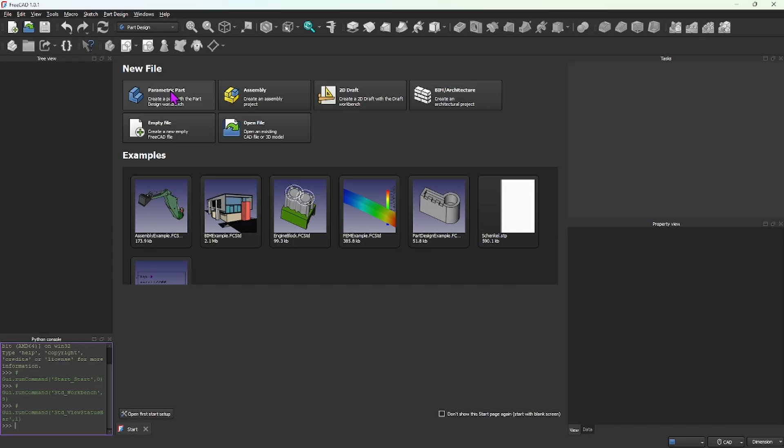So here we go. Let's go ahead and open up FreeCAD. I drew the bracket earlier. While this is open, I'll talk. The approach I used was not all that great, so I'm going to redo it on this go around. So I'll consider that as a practice session. All right, parametric part. Here we go. FreeCAD opens.

I'm going to save as. You can see the shelf bracket up there. I'll go ahead and select that, overwrite it. It's an empty file. All right, the bracket's going to have a couple parts to it, maybe 3. So I'll go ahead and make this, name it, rename. There we go. I'll just call that bracket.

And I know we're going to have one other part, and then I'm going to clone it and mirror it. We'll see how that works. So I'm going to go ahead and add it while I'm here. And rename that. And that's that wire that you saw in the bracket.

All right, go up to bracket, make sure it's an active body. Start a sketch. I think I'm going to use the YZ plane. Double click on that. And double check my grid. I know I checked it earlier. I am in inches. Go down to Sketcher. My grid is set up to 1-inch blocks.

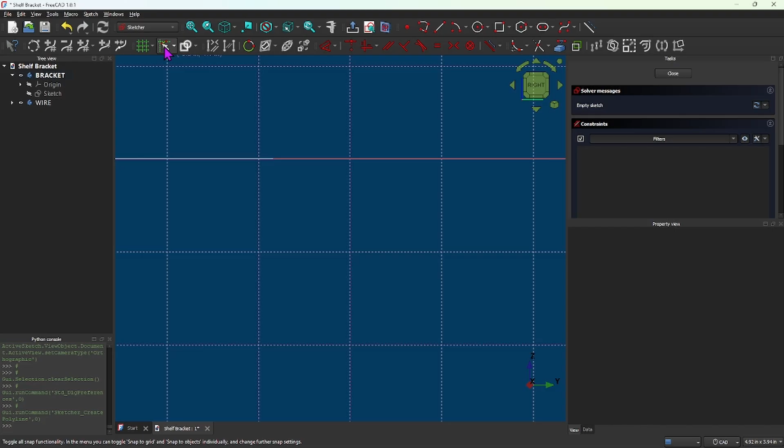I'm going to use this polyline here, and let's see. I got the grid line turned on, but it's not snapping to the line. So I've noticed that sometimes I have to turn it off and then turn it back on for it to work. Yeah, that's exactly what happened. All right, so 6 inches. That's 2, 4, 6. We'll start here. There you go. I'll go up a little there.

I think somewhere around here. Let's make that horizontal. Since we're in polyline mode, I can use the M key on my keyboard to make a selection of what I want to do with the line, and there you go. I want to do that right there. I want 90 degrees, but we'll change it. I'll get it close for now. And then from there we got 2, 4, 6. Is that right? Yeah. 2, 4, and 6.

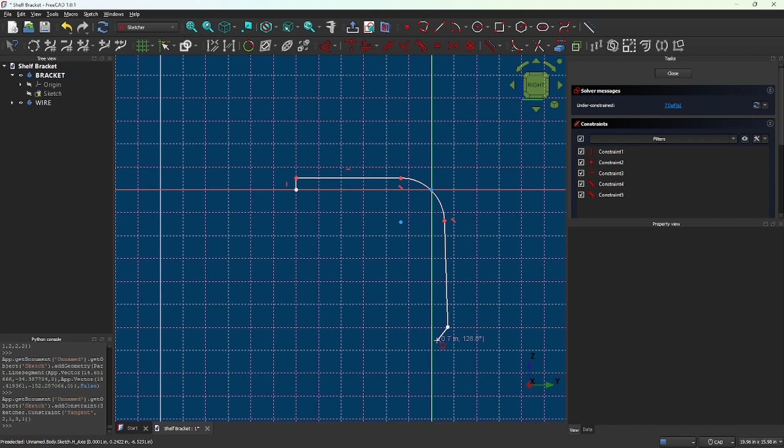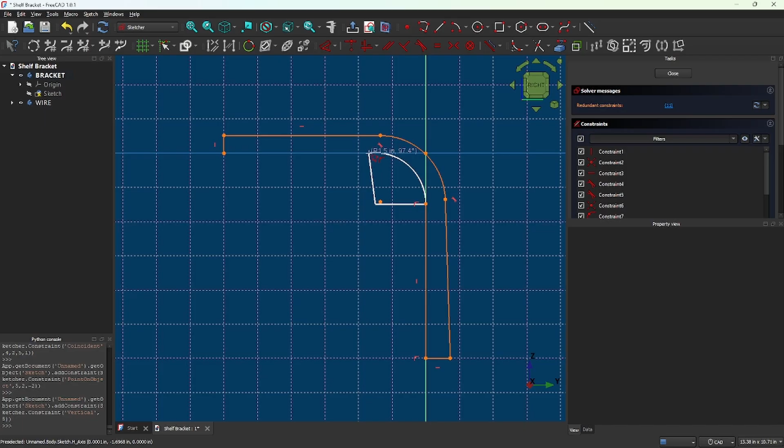So we want to go to this line here. It's snapped. Go to that corner there. Snapped. And we'll come back up to here. We won't go to an intersection, but we'll just select that Z reference line. It doesn't like that. That's okay. We'll fix that. We use the M on the keyboard. There we go. And I do want to snap to that line. And then I'm going to come over here. M to close it there.

All right, I think if I just remove this vertical constraint, it should fix everything. There you go. The reason is the Z axis is already vertical, so I went from this point here to this point along that Z, and it gave it a vertical constraint, which is redundant because you're attaching to the Z axis. Let's just leave it at that. Let's fix this line here. That needs to be vertical. There we go.

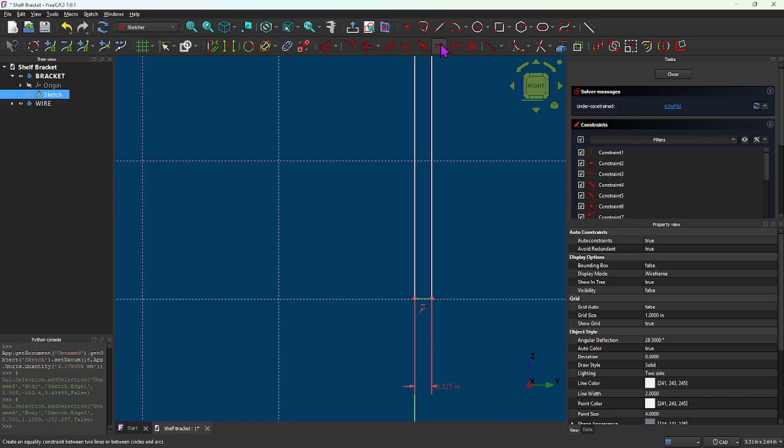It is 1/8 of an inch thick. Make that 0.125 inch. And we'll make that line and this line equal. Equal sign. There we go. All right, that line's right there. Look at that. We didn't quite get to the line there, so I'll have to make this point 6 inches up to the Y axis. 6, enter, there you go. That fixes it.

And what do I want for a radius? Let me measure it real quick.

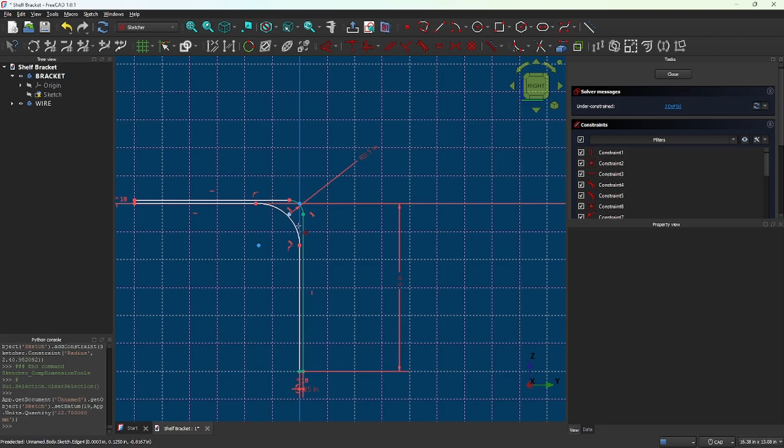I'm showing the outside radius as a 1/2 inch. Put this, and I'll make that 0.5. And then the inside radius is going to be 0.375 or 3/8. There we go.

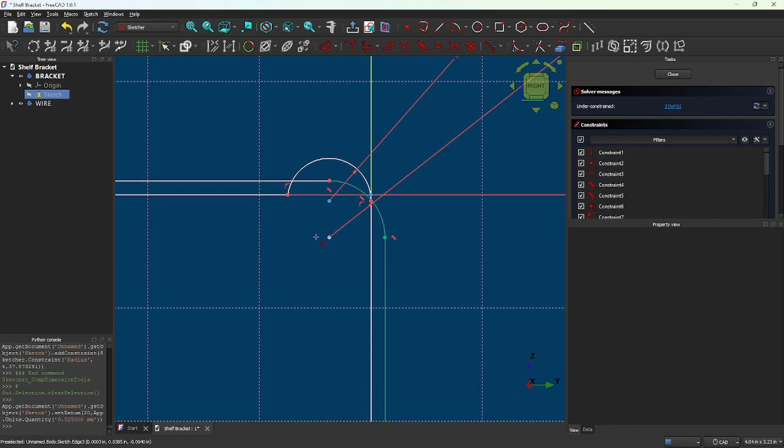All right, so this, I wanted that at 0.375, enter. And what did I do wrong there? 0.375. Okay. Either way, let's go ahead and just make these 2 points on the end of the arc, make those constrained horizontal.

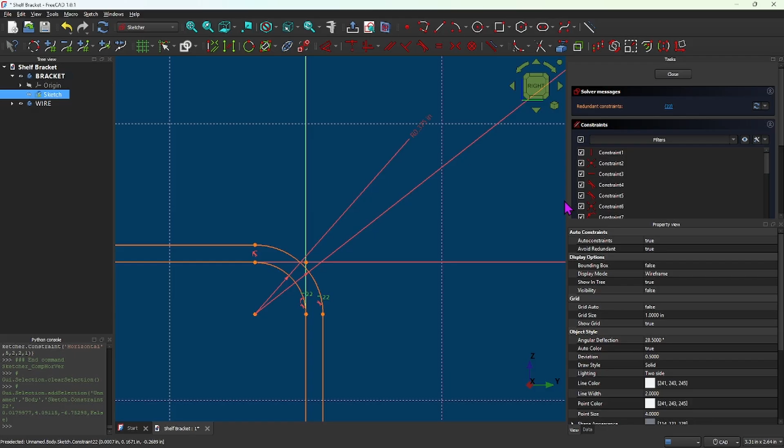All right, now we gotta remove a constraint here somewhere. Okay, it's saying number 22 up here is redundant. So if I delete 22, okay.

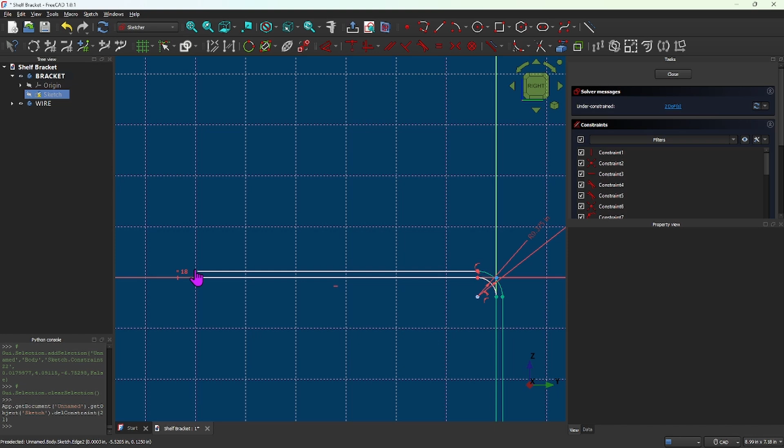All right, let me make this 6 inches from here over to the z-axis. Okay. And then I think what I need to do is just make this line equal to this line here, since that's already fully constrained. And that should take care of it.

Let me give it a try. So select that line, then this line, see if equal works. And it does. Yay. I didn't have to supply a dimension. That's good. All right, we're going to close out of there. And we will pad it. And I know I measured it earlier. It is 3/4 of an inch, so that's 0.75 there.

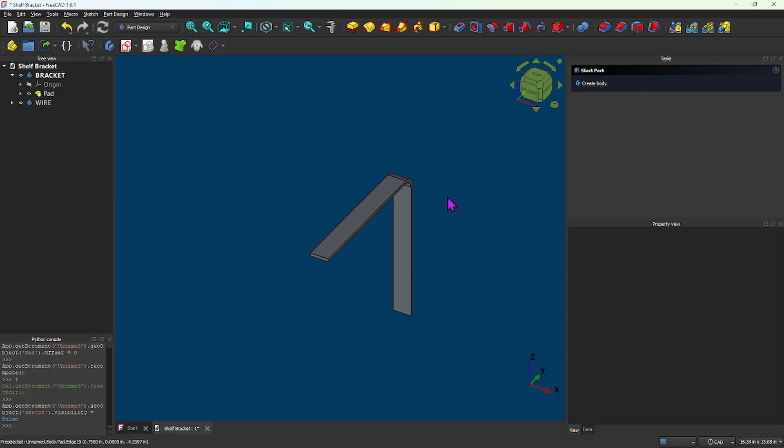All right, let's put some holes in it. I will start with the top by selecting that face and then selecting sketch. It'll use that sketch face as a sketching surface. So there you go. We'll do that.

This bracket has a hole right here and then one that is closer to this bottom edge here than the center. I don't know why they did that, but I think it's because of the way they put the wire braces in the bracket. Maybe they offset the hole because it made it easier for a screwdriver or a drill to utilize that hole. So we'll see. All right, so we'll just go ahead and put the 2 holes there.

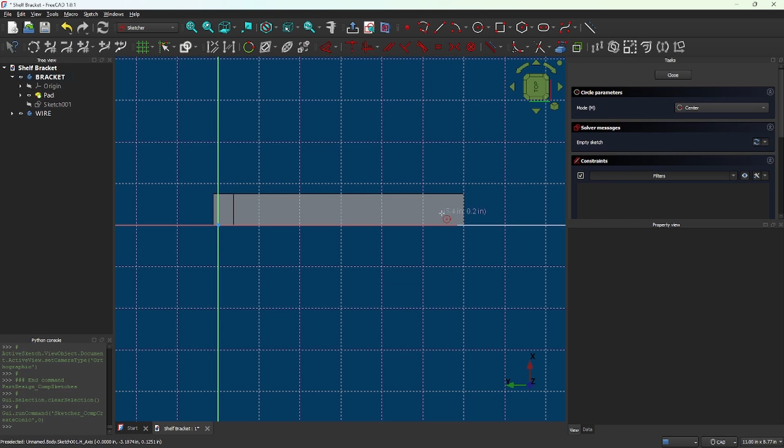Just there. I'm gonna put one over here. Let me hit escape to get out of that. I'm going to turn the snap off because there you go. There you go. All right, and the diameter, I forgot the diameter. I think it's 3/16. Double check it real quick. It's a 1/4 inch hole, 0.25.

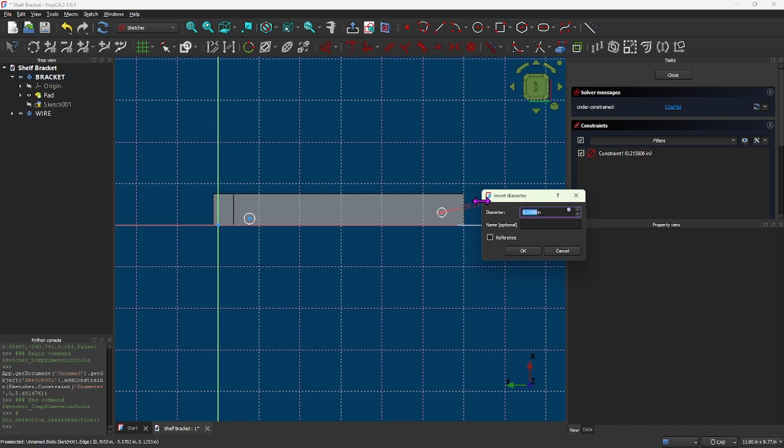All right. And we want this hole to be equal to this hole, which is already dimensioned, and we'll use the equal sign. Okay, the holes are equal. Now we just need to place them. This one is centered, so it should be 3/8 from there to the x-axis. 0.375. And then this one over here, so from the center to the edge is 1/4 of an inch.

So from there to that line, let's go 0.25. All right. Still got 2 degrees of freedom. I want this one from here to this edge is 3/4 of an inch. I measured it earlier. I can go all the way from here over, which would be 5 1/4, or I can use this.

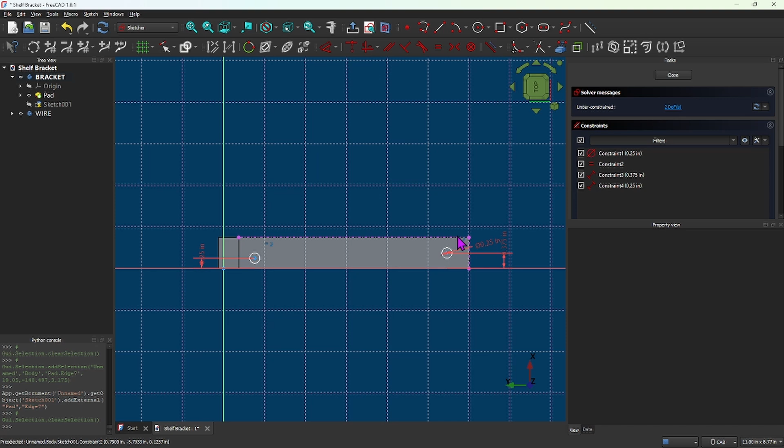Since I used this face as a reference to draw a sketch, I can take advantage of using this icon up here, select it, and use this line as reference on that one. Actually, probably only needed that one there, but that's okay. All right, so from there to there, we'll make that 0.75. That one's constrained, and if I'm not mistaken, it's from the inside of the bracket right here.

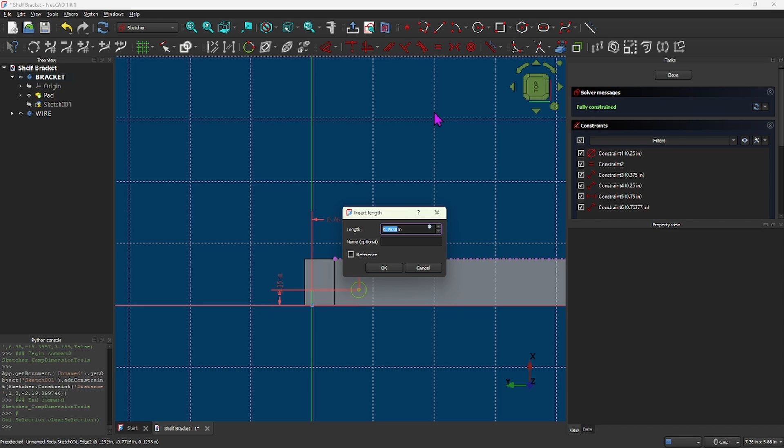That inside leg over is 3/4. So let me double check that. It's actually 7/8, which would have been 1 inch from this outside over, but we'll go here. All right, so from the y-axis over to the center, 7/8. We can use a fraction on this one, or you can go 0.875, either one. But let me use a fraction. 7/8, 0.875. There we go. Okay, it's fully constrained.

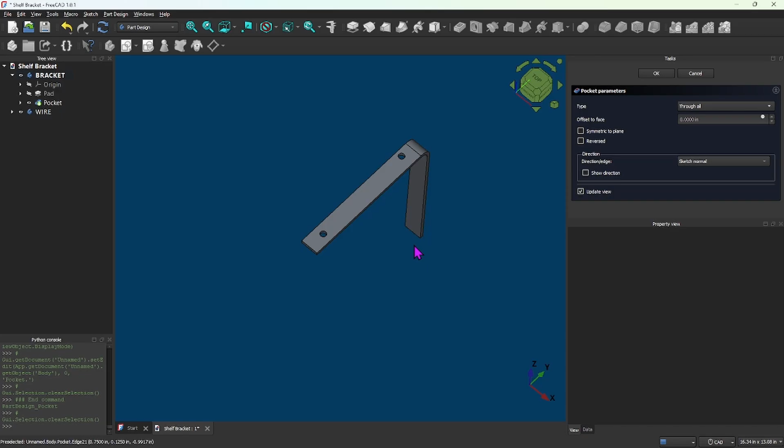Now let's go ahead and close out. And we're going to go up here and use the pocket command and set it for through. You can see the hole already went through, but that's because of this dimension here. I just like to use the through all. You never know when you're going to come back and change the thickness here, and then that 0.19 would not work if you made the thickness more than 0.19.

So I'm just trying to get in a good habit of, I know that hole needs to be drilled through regardless of the thickness of the bracket. So I just went ahead and did that. All right, I'm going to select OK. We're good there. And then we need to repeat that over here.

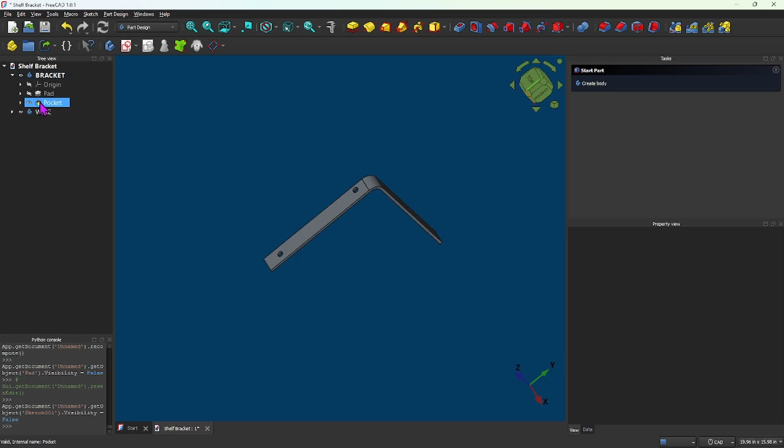Now in the previous bracket, one of the things that I did that did not work too well was I was able to take this pocket over here on the left, the pocket wire, that sketch right there, select it and take those features and move it over to this leg here, copy it over, but the hole remained on that upper side edge and I needed it over here, and I just ended up wasting a lot of time when I should have just gone ahead and selected the face and drawn a new sketch for the hole. So that's for the pockets.

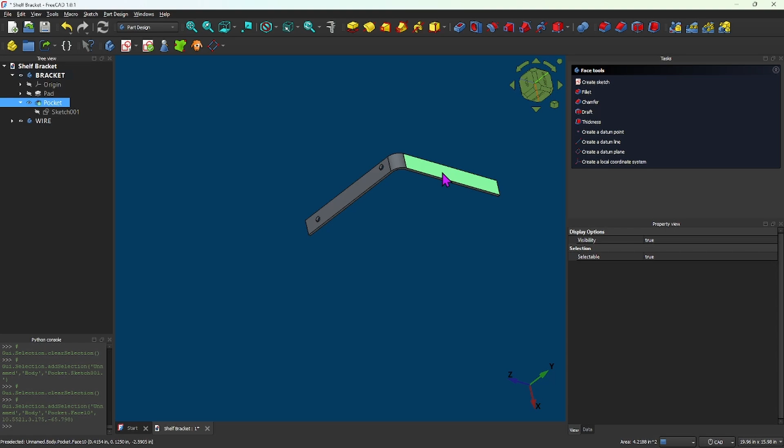So that's what we're going to do this time. Select that face, select sketch, and yep, right there on that face. All right, put 2 holes in here. We knew that one is about right there, and the other one, since that's there, it needed to be here. So somewhere around here. And I'm going to go back to the pocket sketch and just get my dimensions there.

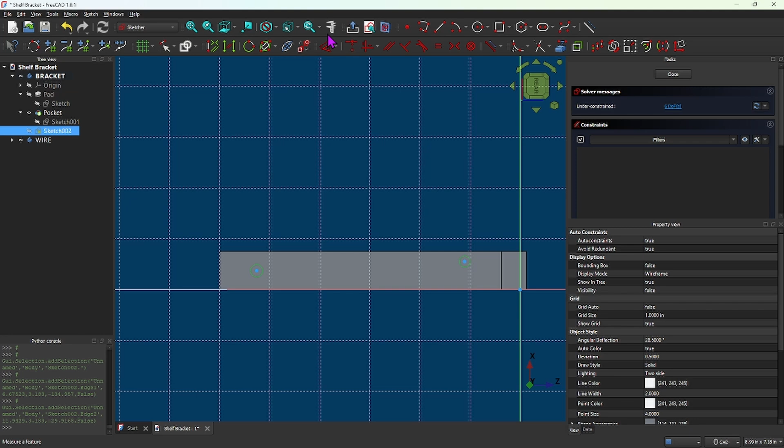The diameter is a 1/4 inch diameter. Close that out, go back to this sketch here. These holes will be, I think I can select both of them. Oh, no. Go up here and hit diameter, 0.25. I was thinking I could do both circles at the same time, but I kind of messed up. If I would have selected them and then did the pull down and went constraint diameter, maybe I could have done both of them. But you notice this time I didn't set one equal to the other.

It's just, sometimes I'm consistent and sometimes I'm not.

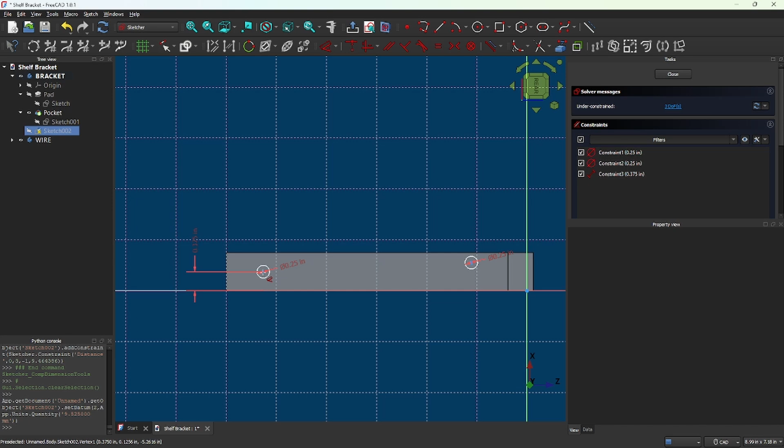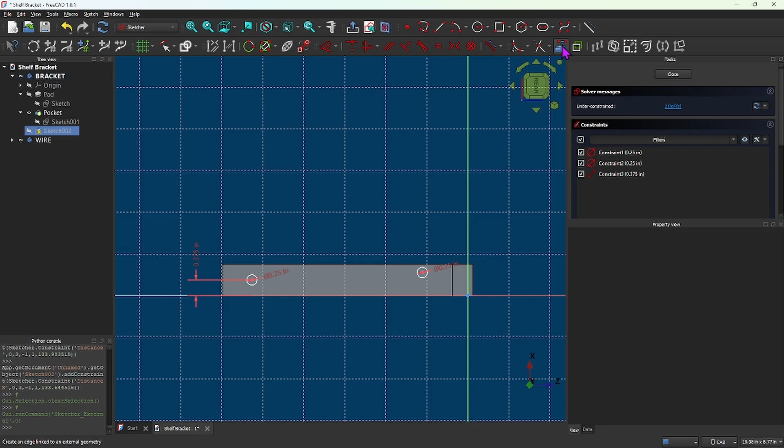All right. So I know from here to this Z axis should be 3/8, 0.375, and then from there to, here we go again. Let me escape. Right click to get out of that dimensioning. And I'm going to come up here and select this reference and use this line. There we go. And we're 3/4 of an inch over from that. So select the center to there and 0.75. We're good there.

And then we said this one was 1/4 of an inch over, if I'm not mistaken. Let me double click on the other sketch to make sure we are, yep, 1/4 of an inch. Let me double click back to sketch 2. And we're going to use that reference line there. Reference command, select the line. There we go. Now I should be able to select the center, the endpoint, or the line, either one. Endpoint. And we'll go with 0.25 and we'll enter that one.

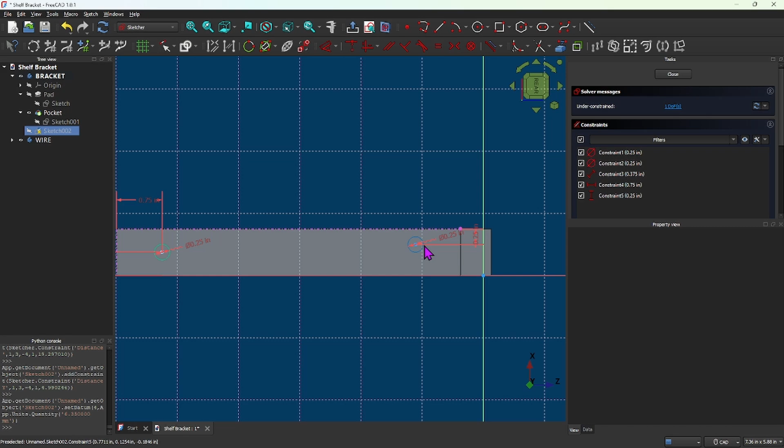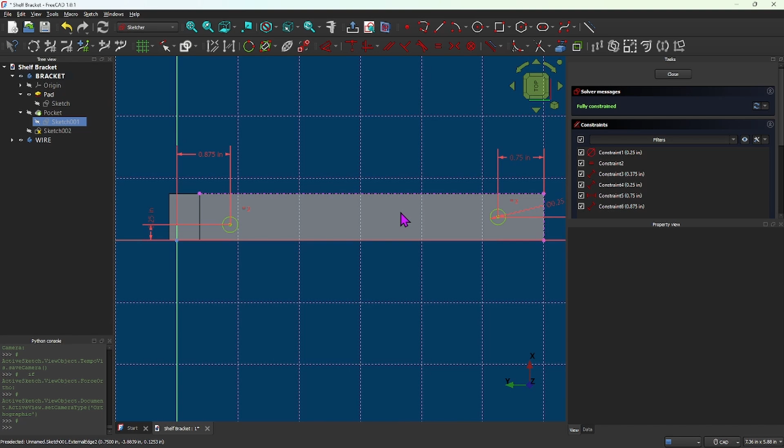Oh, okay, this is now just missing a dimension in that way. We know it's 4.5 inches from center to center. I'm going to double click on the sketch here. .75, 3/4. No, I guess not. That's interesting. I thought it was 4.5 earlier. So from center to center, put a dimension, and it's showing 4.375. Cancel that. Alright, right click. Alright, let me double click on sketch 2.

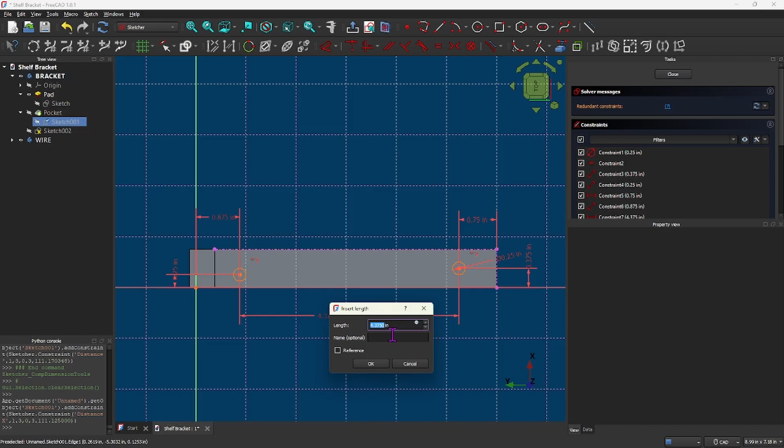And we're going to go with, I forgot it already. Oh boy. What was it? Alright, remember it this time, Billy. Center to center. 4.3, so 4 3/8. Cancel. Right click to get out of that. 4 3/8. Alright, so from that center to that center, 4.375. Okay, there we go. Alright, let's close that. And we got circles.

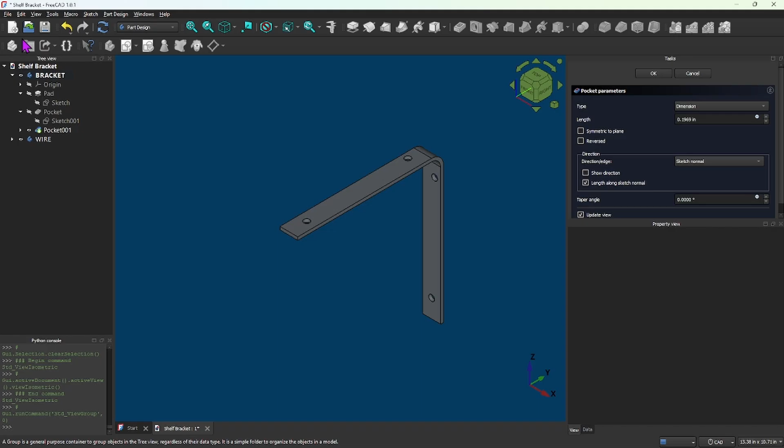We're going to turn them into pockets, and we're going to change it to through all. And there we go. We got the bracket. Come up here and hit ISO. And if you remember, we had some squiggly lines in here. We got to get to work on that. So let me turn these origins on here real quick. What am I going to do? I'm going to draw the squiggly wires here on this YZ plane, and then we'll go from there.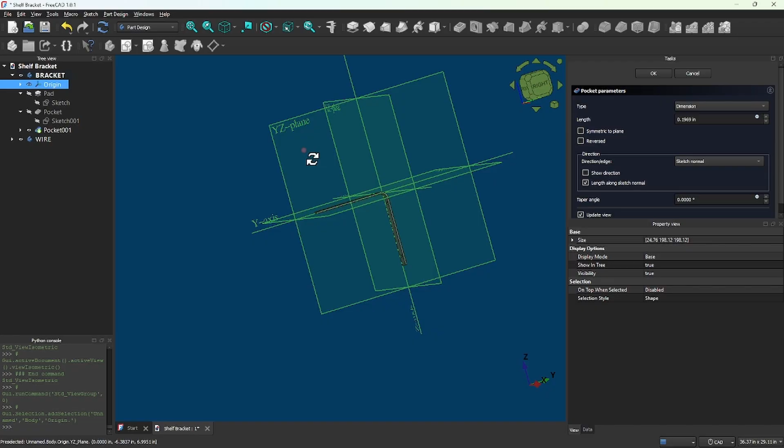Yeah, because then I'm going to have to come back and use this plane here, which is the XY plane. I'll use XY to draw the profile to go along the path of the wire that we draw. So get over here, we're going to use YZ plane. Alright, so turn the origin off. Collapse the bracket. We're done with the bracket. Now we need to do the wire. Got to do a new sketch for the wire, but first I need to right click it and make it an active body.

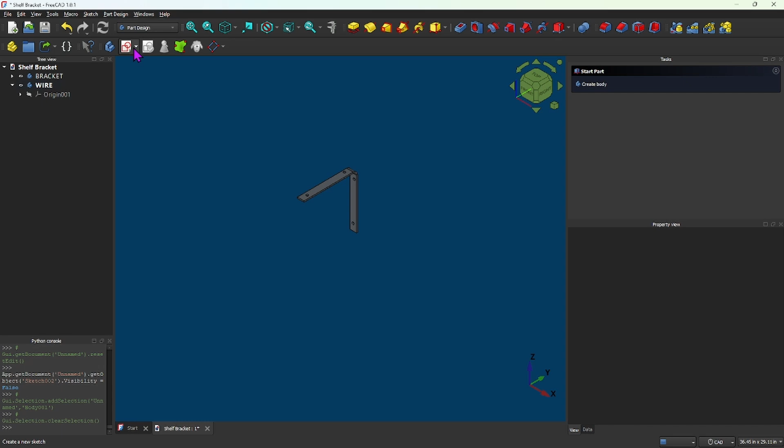Alright, active body. Oh, I was wondering why the sketch up here was shaded, and the reason being I didn't close out my pocket over here, so close that out. Alright, the wire is an active body. Now I can start a sketch. And I want to use this YZ plane right there. Double click. There we go.

Alright, let me show it to you one more time so you'll know what we're working on here. Back. Here we go. Okay. So we're going to do one of these lines here and then make a copy of it, mirror it. So we're going to do the path first, which is the wire. And then we're going to come out here on the end, either here or here, and draw a circle for a profile. And then we're going to make it follow that path right there to do the wire. There you go.

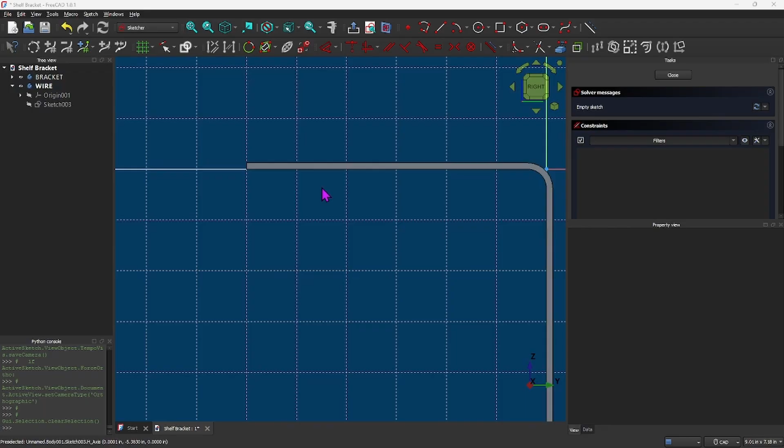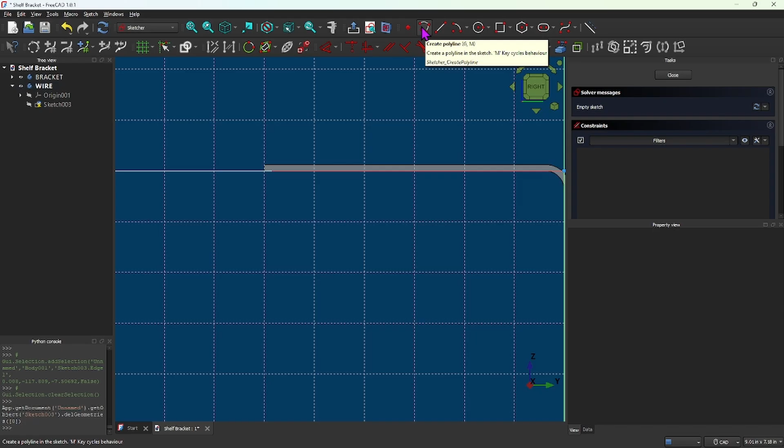Okay. All right, turn this on. I want the end of that line to attach to the grid line. Snap it up there, right about there. Let me use this command here to remove some of the model so you can see it snap to that line. Create a polyline up here, and then we'll snap. The reason why I want to use a polyline is so that I can put radiuses in here. That'll save me a little bit of time where I don't have to put fillets.

So in polyline mode, you can use the M key on your keyboard to just keep selecting M until you get to the radius. One more time. There we go. All right, we're going to swing that around. Then we're going to put a straight line in there. I don't want to snap to any grid lines there. I'm using the M on my keyboard. There we go. Another straight section there.

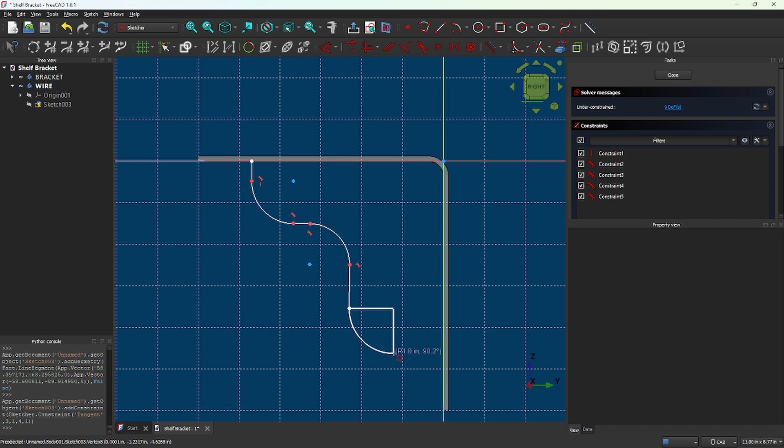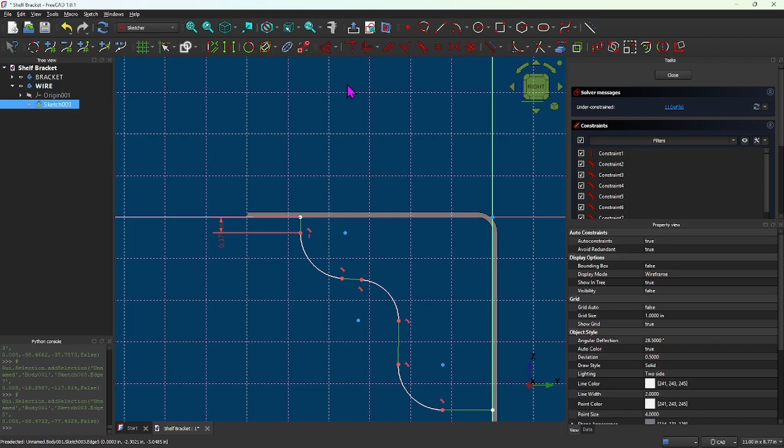And use the M on the keyboard to get a radius. Somewhere in there. And then here, I'll snap to the Z-axis. Then right click to get out of it. Okay. I measured these line segments earlier and they were 3/8, so I'm just going to make all the line segments 3/8 long. 0.375. Click. Now I should be able to select that line segment, and that one, and that one, and then hit equal. There you go.

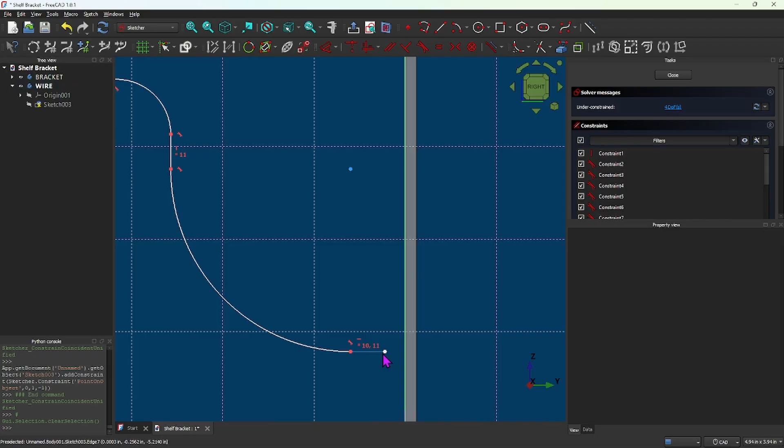Let's now make these lines horizontal and vertical because I don't see that constraint. Yep, look at that, it's jagged. So select the line and come up here and do horizontal constraint. Select this line and it should default to vertical. Select this one and make that horizontal. Now we just gotta play with this right here. I do want this to be coincident to this line here. Select that and use the coincident constraint. Lock that in. And the same here. That point needs to be coincident to that.

Alright, so let's get this line segment from here to there. I'm going to have to measure that one again. I'll let you know what I come up with. Yeah, I'm getting 1 5/8 from the underside of that bracket to here. From there to there, 1 5/8, so it should be 1.625. Therefore, it should be the same here too, from here to the underside of the bracket. I'll make that 1.625.

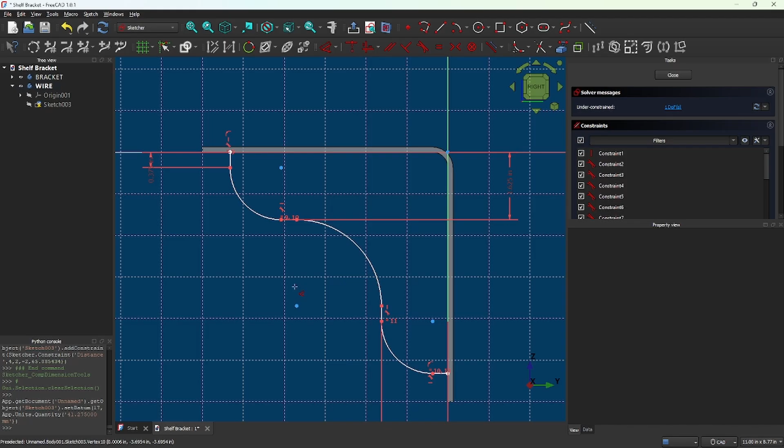We got 1 degree of freedom; let's grab it and move it around, see where the freedom is. I think if we just locate these endpoints of this wire, from here to here, that'll take care of that 1 degree of freedom, and this radius here will adjust itself. And that dimension should be 1.5 from there.

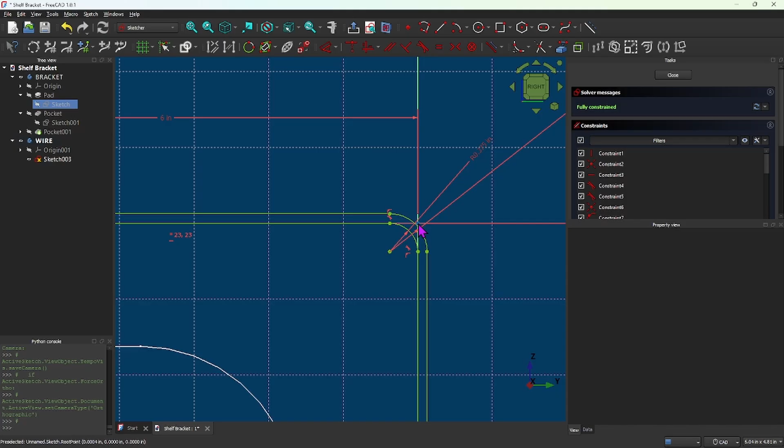And since I did not select the face here as a place to sketch, I cannot use this as a reference, so we're just going to have to do math. I know that from here to the end point is 6. Let me go back and look at the bracket sketch. I just want to make sure I get it right. That was from the center point there, which is inside. Alright, so from there over is 6 inches.

Minus 1.5 inches, so it should be 4.5 inches. Alright, let's go back to sketch 3 and see if that works. So from this point over to that point, it should be 4.5. There we go, fully constrained.

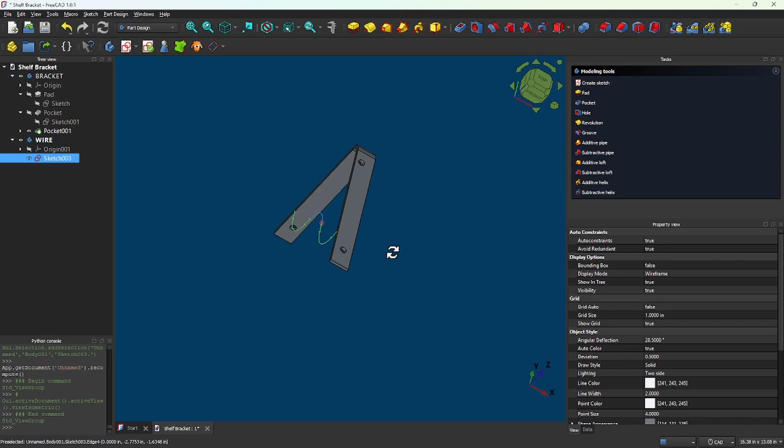We can close it now. Is this up here? We have a wire. And now this wire is going to be the path where we run a circle, and we're going to use this loft command, pipe lofting I think, or additive pipe. That's a loft.

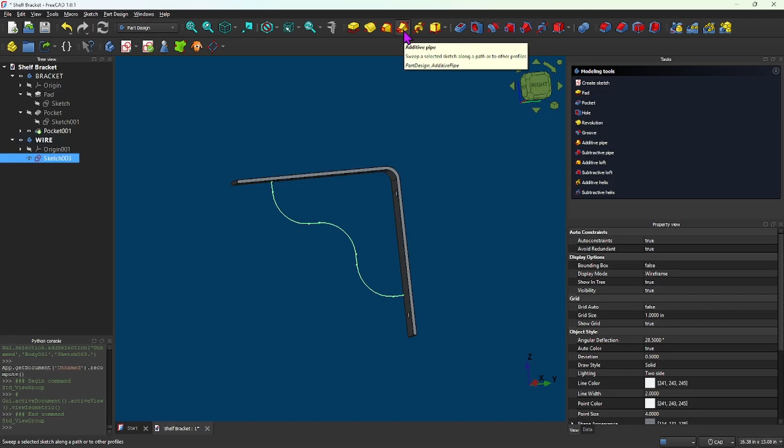Sweep a selected, let's read it. Come on. Sweep a selected sketch along a path or to other profiles. So we're going to go along a path. Now we have to get the diameter of that wire drawn on this endpoint,

and that is why I chose to put, oh hold on, let me make sure that's right. Yeah, that's why I put the end of this wire to the underside of the bracket, because that underside, oh, I put the underside of the bracket on the origin. Let me show you that up here.

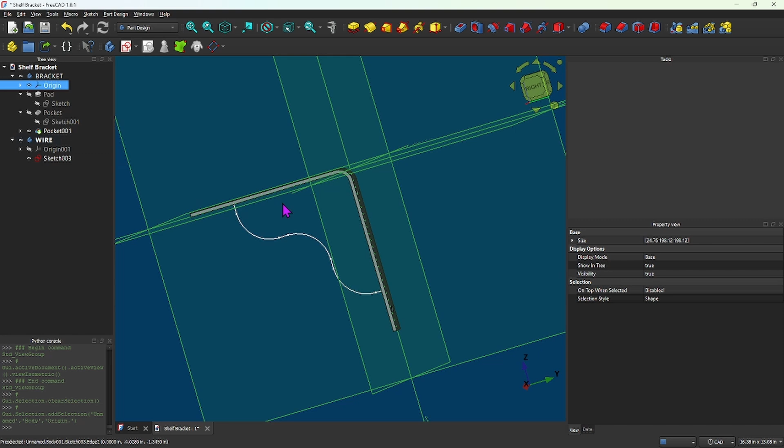Turn the origin on. There you go. There you go, you can see the bracket laying on the plane there, the XY plane to be exact.

And it's going to make it easier to draw a sketch on the XY plane and put the circle right over the end of that wire. In a previous bracket that I drew, I made the mistake. I didn't realize it was a mistake at the time, but it just made sense to me that this outside edge of the bracket was flush to the plane, but then it created

issues for me when I started to put the profile, that circle, on the end of that wire. So I'm glad I'm remaking it because I can make the video shorter. So let's go ahead and do that.

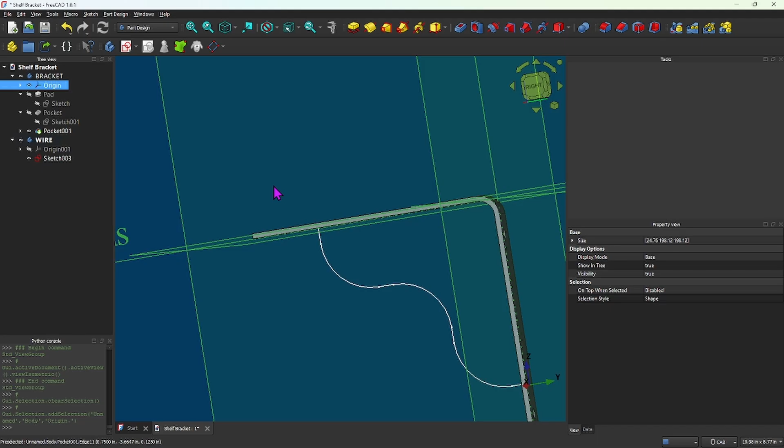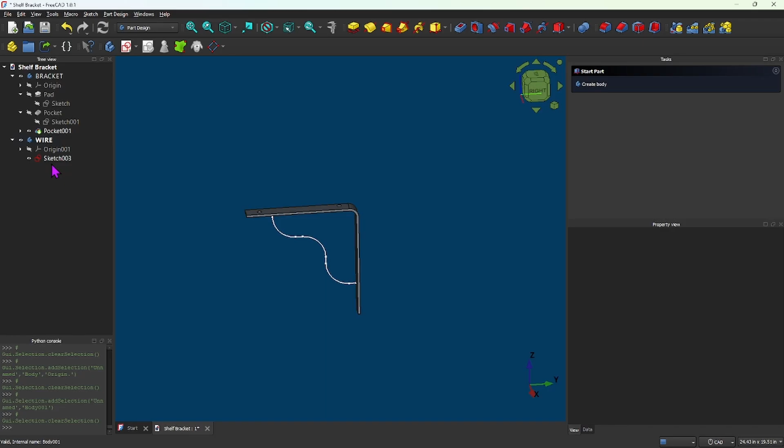Alright, and we may have to do a little bit of math here to get that wire there. Alright, turn the origin off. We already know it's going to be on the XY plane, so turn that off. And we're going to do a new sketch, but we want the wire to be an active body, and we're going to start a new sketch in that active body.

And it's going to be on that plane right there, so double click that plane. I want to skew it over. You can see the end points right there. That's where I want to get to.

So what I'm going to do now is take this bracket right here, and I'm going to go up here and select the eye to make it disappear so I can focus on getting here. Alright, this reference is not going to work on that line. I'm wrong, I stand corrected. It did work.

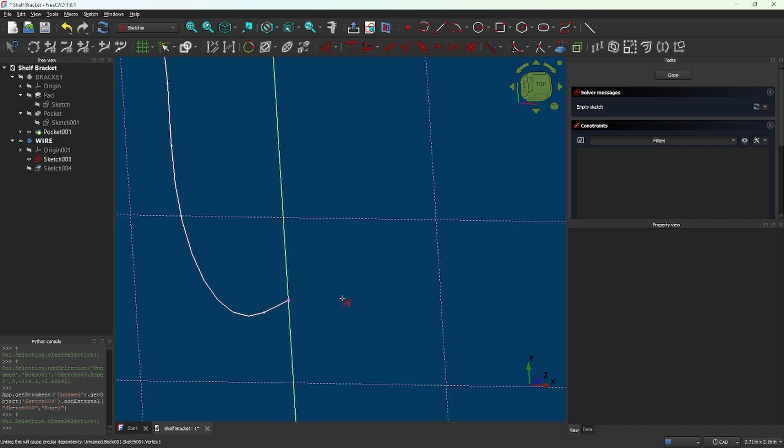I think it's because it's inside of that wire body, it allowed me to use it, so that's great. That means I don't have to do any math to figure out where to put the circle or the profile. So there we go, that's going to be the center of our circle. Yay, hey, something worked for me.

Hard to believe. Alright, there. I know that circle I want it to be. I thought I knew what I wanted it to be. Let me select it. That. And I think it was 1/4 inch. Let me double check that. Double checking, and yeah, yep. I'm going 1/4 inch, 0.25, and there we go.

Alrighty, look at that, it's right on the end of that wire, so now we can close this. While it's selected, we should be able to come up here and do the yellow, the additive pipe.

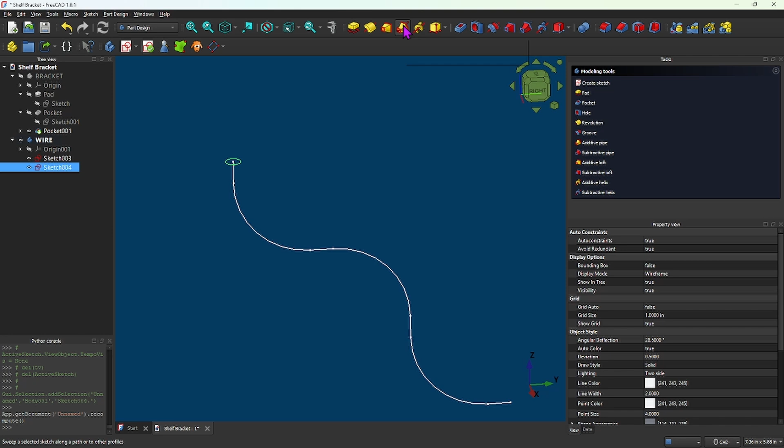Select that. I'm getting invalid subnames right here. I think we're going to be okay. No spline. I probably could have or should have selected the spline before I selected that, but that's okay.

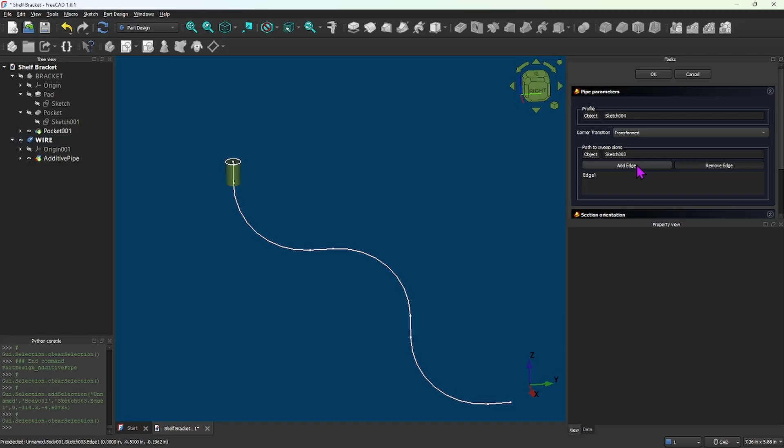We can add edges right here. Sketch 4 is the object. Here's the path. So select an edge. There you go. And you have to select this edge each time, which is why if I would have selected that wire before, then it would have gone ahead and made the sweep for me instead of doing what I'm doing now.

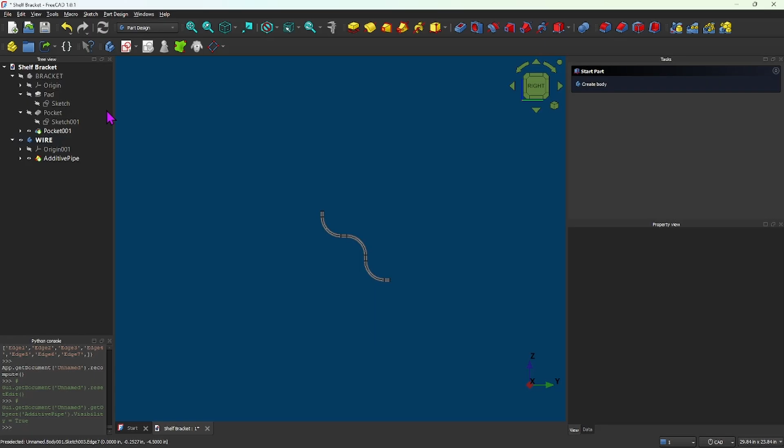Add the edge, and you'll notice that as you select the add edge, there's like a magenta border around it, and you see the path that's already been selected is magenta. So whenever you see that magenta, that's a good thing. All right, add this last one here, right side. Okay, select OK, and now I'm going to bring the bracket back.

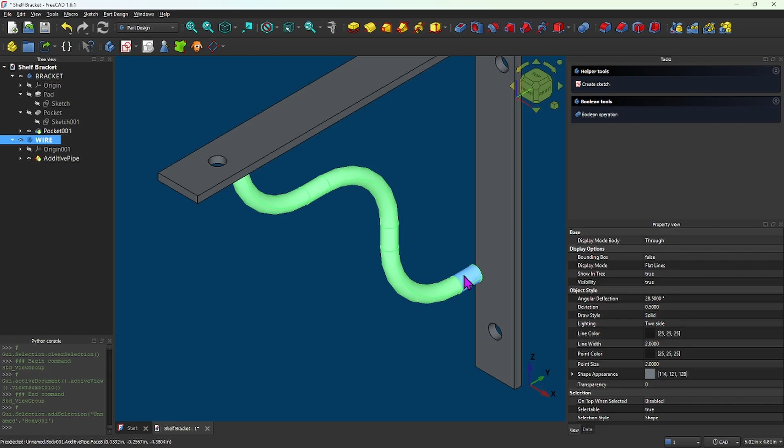All right, now all we got to do is move that wire body over. Just to explain to you earlier, I tried to draw this wire and tried to make a copy of it, but ended up referencing it somehow to this bracket. So I couldn't move the wire. When I moved it, it created another bracket, and I had two brackets and two wires, and couldn't do anything with it. That's why I had to start over, which is a good thing - I learned from the first one I created.

We will now need to make a copy, a clone of this wire, mirror it, and then after we mirror it, we can center it on the bracket where it belongs. All right, I might go ahead and try to center that now.

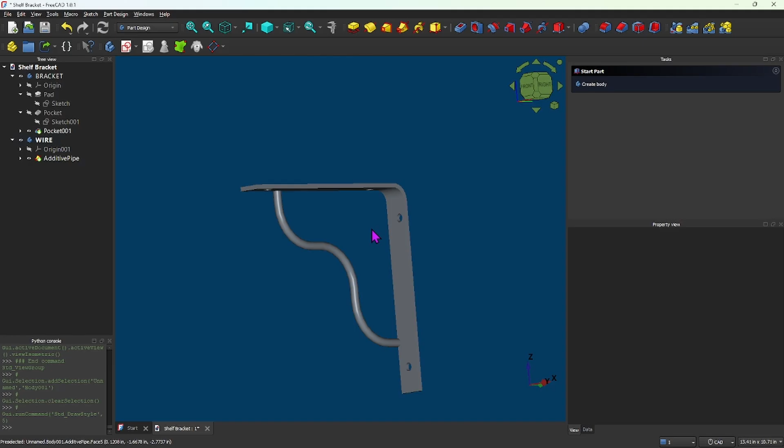Some people kind of don't like seeing all these lines here. You can right click and go into your drawing style, set that to shaded, and you get that shaded look. But that's when you're developing, if you're going to render your model. If you want kind of a rendered look, you can do that.

I find it easier for me when I'm constructing to use the wires. So I'm going to right click the screen, put the drawing style back - that's no shading, I don't want that. I want drawing style, flat lines. There you go. It still gives you kind of a rendering with light reflecting off of it and the lines at the same time. That's fine with me. That works. All right, so what's the next step?

I want to copy this wire, but first let's get it into position. We want to move this over along the x-axis. I would say 3/8 of an inch, but then that would put that right dead center. And we got to make a copy of that wire, mirror it, and put it beside it. So we don't want to quite go there.

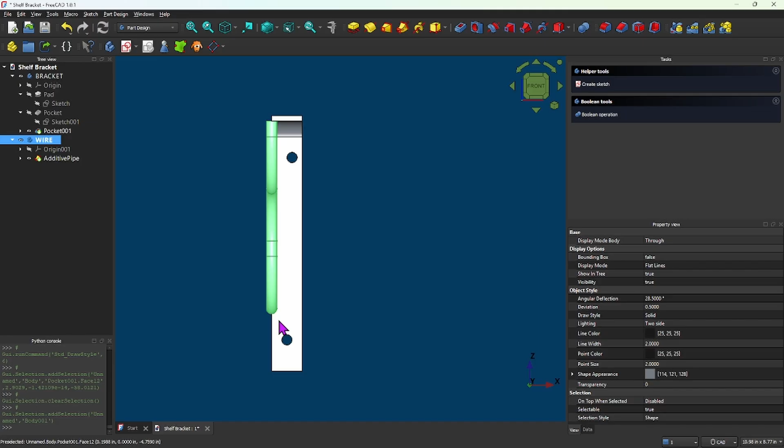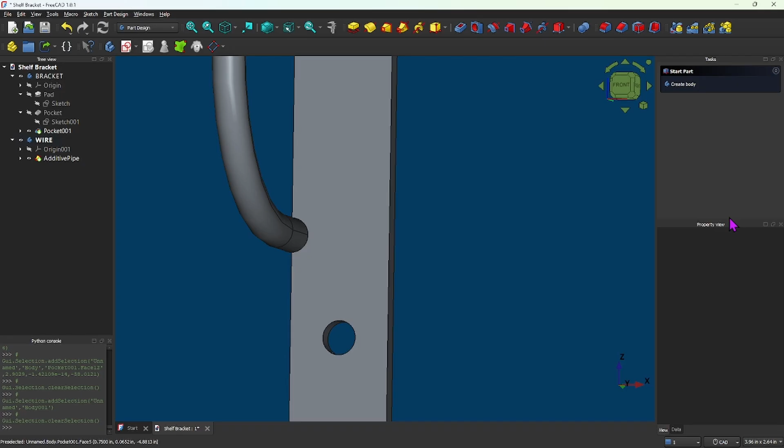What we want to do is put the edge of that on the center of this bracket here. So let me show you a trick for doing that. First I want to slide this over. I had to mess with these earlier too because I was reading information. All right, so we're going to go in here and grab this.

I'll grab that line right there, and I'm going to hold down the control key and grab this circle. With those two selected, I should be able to use the caliper icon, which is to measure, and it'll give me some X, Y's, and Z's. See that red X? You can't read it because it's hidden behind the Y. But that line right there, that's how far we want to move it over. So what do we do - rotate the view, or maybe we can zoom in.

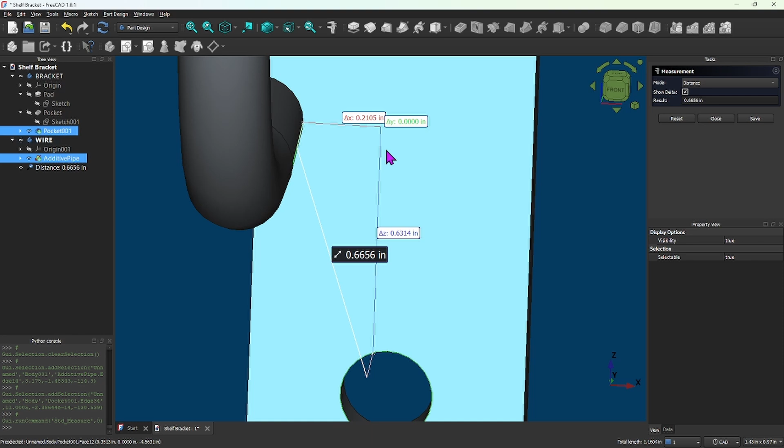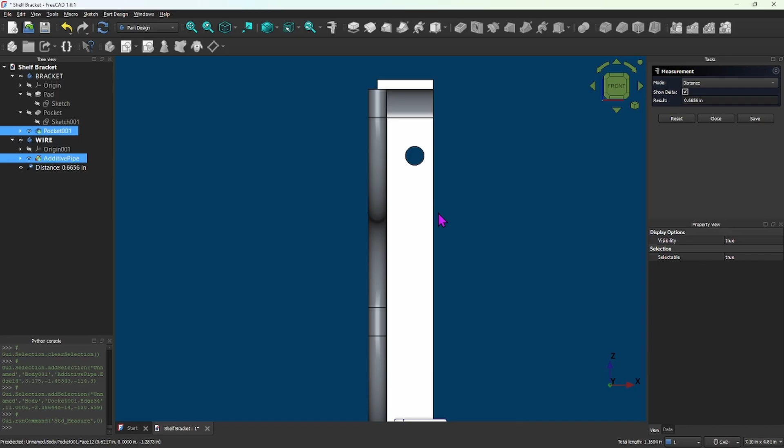There you go, zooming in helps. We want to come over from that edge. Oh, you know what? It's not to the center. So let me try a different way, because that should have been a better number than 0.2105. Let me try a different way on that one. Front, come on, Billy. That's strange, it should have gone to the center of the hole. Guess not.

Alright, I'm going to try something different. Let me close that, and I might be able to grab - there you go, I want that edge right there, that circle. That one, hold down control key, select this one, and now do the calipers, and this time it went center to center.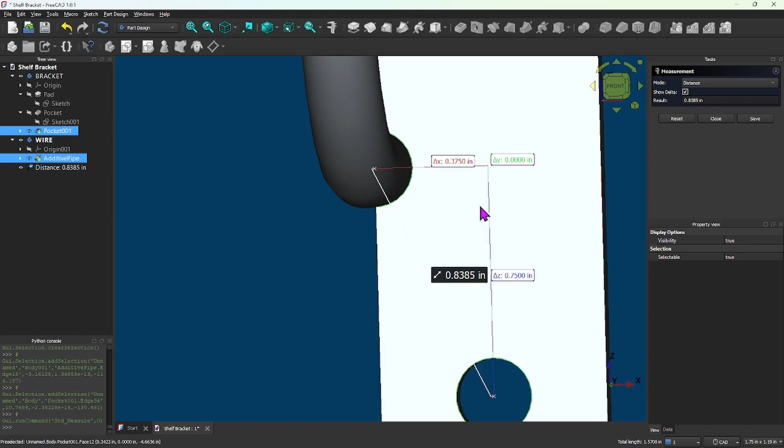We need to go over 3/8 to align it, but we didn't want to do that. We want to go 3/8 to that edge right there. So maybe I'm going to have to do math. Since this is a 1/4 inch diameter wire, it's going to be 3/8 minus 1/8, so that puts us at 1/4. So I should be able to just move it over 1/4 and we'll be fine.

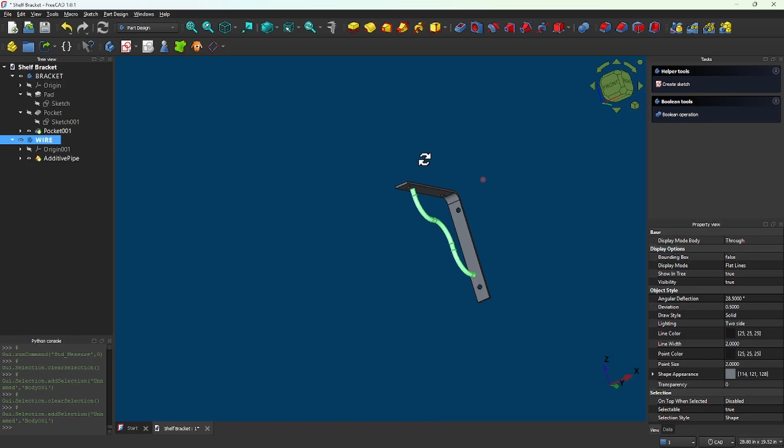Alright, close the calipers, and we're just going to move this wire to the right along the X just 0.25, and that should center the edge right on the center of the bracket or the hole. Alright, select the wire, right click and go to transform, and the increment up here we want to set to 0.25.

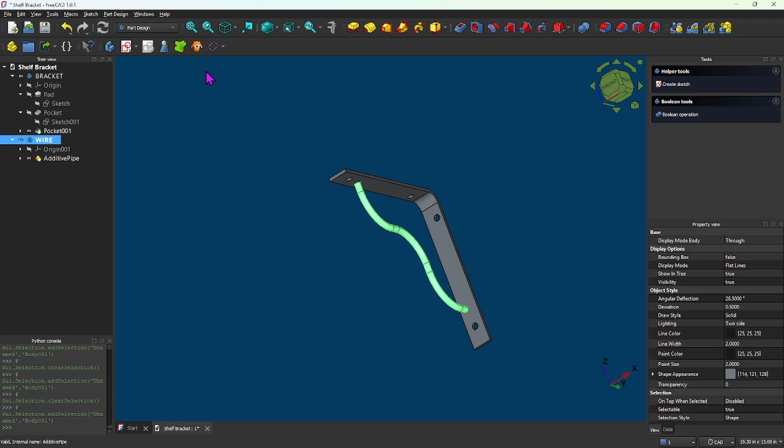You don't need to select OK, just grab this, pull it over, and it went over 0.25. Hit OK. Alright, now let's copy that wire. This is going to be the tricky part. What I'm going to do is clone it with this command here, that wire, and now we have a clone. And that clone, with it selected, coming up here, right click it, transform it - it's already set to 0.25. Pull it over. There we go.

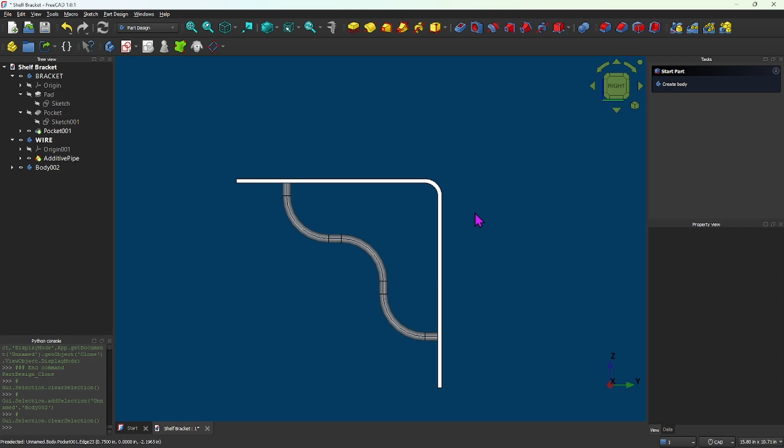Okay, but now we need to mirror that along a line, and that could be problematic. Let's see.

Mirror it or rotate - I think I can rotate it, is what I want to do. Alright, I'm going to have to play with this. Maybe I can rotate it 180, select it, transform it. My brain is kind of smoking right now. I can rotate it in 90-degree increments. Let's see what happens here, but then it's going to end up over here. That might still work.

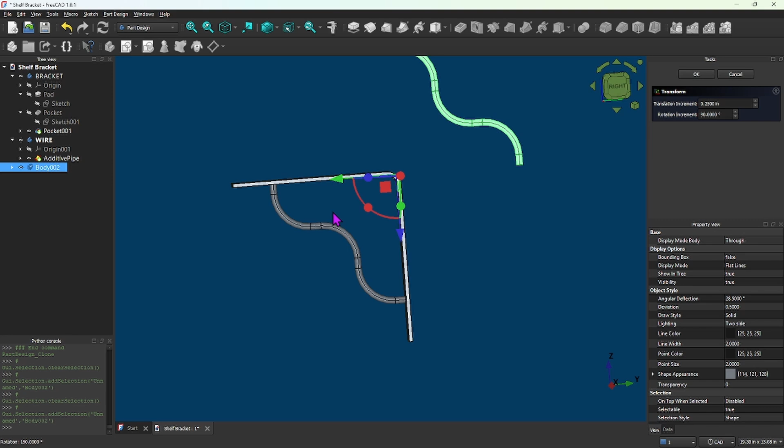Pull around 90, 90. Okay. Now if I can move that down to here and over to there, then I think we got something going on here.

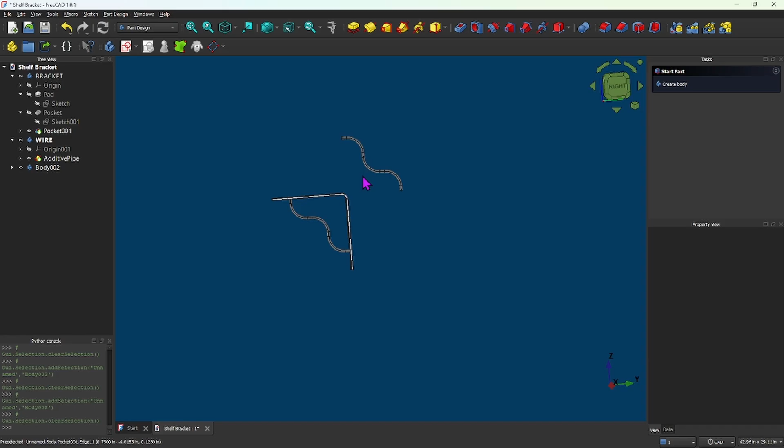Let me see if that's possible. First of all, let me hit the wire, hit this guy here, right click and transform. Like I said, my brain is smoking. Alright, we want to go down from here to here - was 4 and something. I forgot, but that's okay. That's perfectly okay, because I can cancel that.

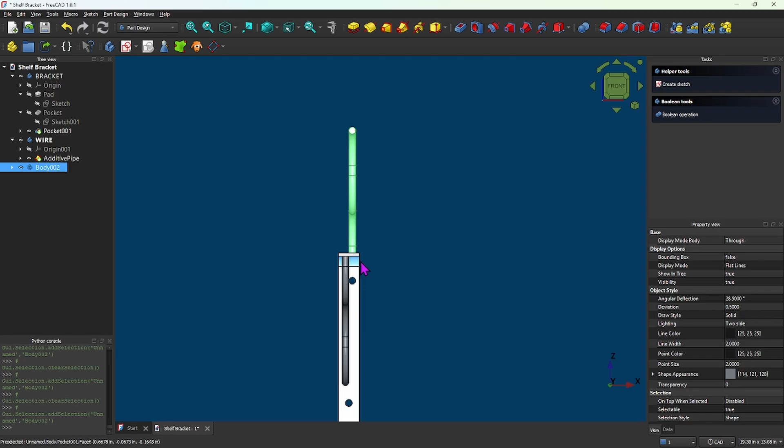And get a dimension. Let's get a dimension from select front, and we want to get this down to - I want that top edge to be there. Alright, my brain is smoking again there. And then I want to select there. Oh, I gotta hold down the control key. So to the bottom there, to there. Hit the calipers, see what we got.

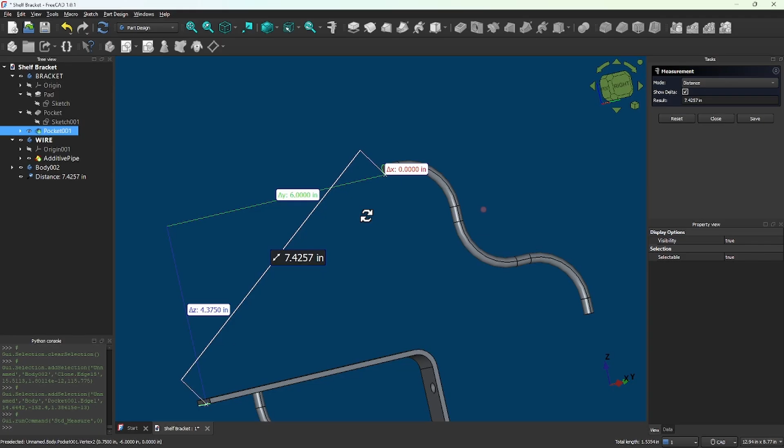Alright, we're gonna bring that down 4.375, plus we need to add another 1/4 inch to get the top of that down flush here. Let me hit the right side. Yep, so that's 3/8. If you add 1/4 inch, that's 2 more eighths. That's 5/8. So we should set the transform to 4 5/8, and let's see what happens there.

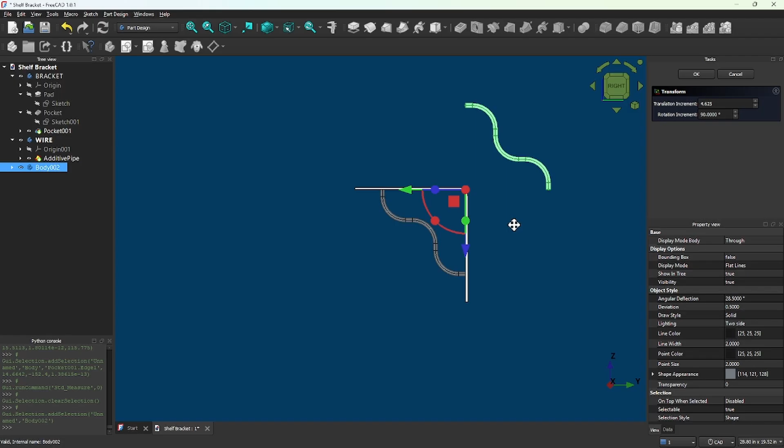Close this, and we'll transform this body. Right click it, transform it, and over here on the right we want to set it for 4.625, and grab this arrow and pull it down, and there we go.

Alright, now I could probably do this a lot easier with the assembly workbench right here. I'm still learning it - I'm getting pretty good with it right now, but for this hardware bracket series, with these static pieces, I'll move them around like this, but I promise you I will get more into the assembly workbench. I'm going to save it for like when we do a hinge where we have a rotating part. We can set a rotation on the hinge, and you can grab it with your mouse and open and close the hinge, or maneuver the hinge along the center of the hinge, and other movable hardwares. Okay, so we got this here.

Now we need to move it over this way, so we need to get this edge over to that inside, which also - it's already set to 4.625, so I can grab it while I'm there and pull it over. Select OK.

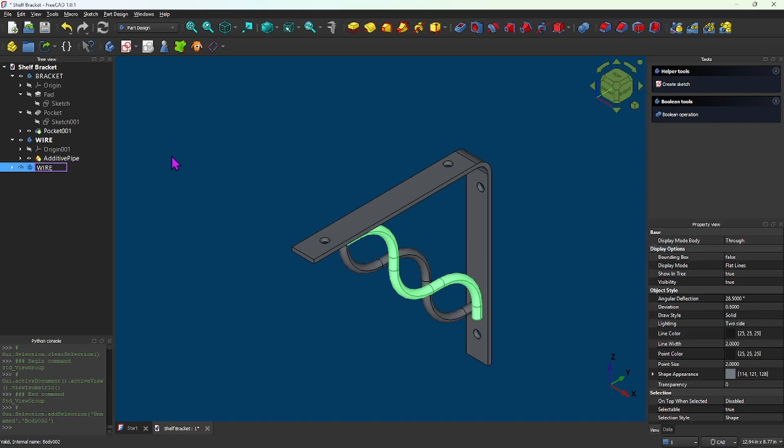That's the bracket. Alright, yay, we did it. We'll rename that wire 2, to show that we have 2 wires there. Select O here, okay.

I'm going to right click it and go ahead and set the view for shade. And it's already the color. Yay! We did it. Oh, I'm happy. Alright.

Let me transition back and show you. This is more for self-gratification. Hopefully I got it turned the right way. Yeah, something like that. Anyhow.

Yeah, good job. You can see how the 2 wires are side by side.

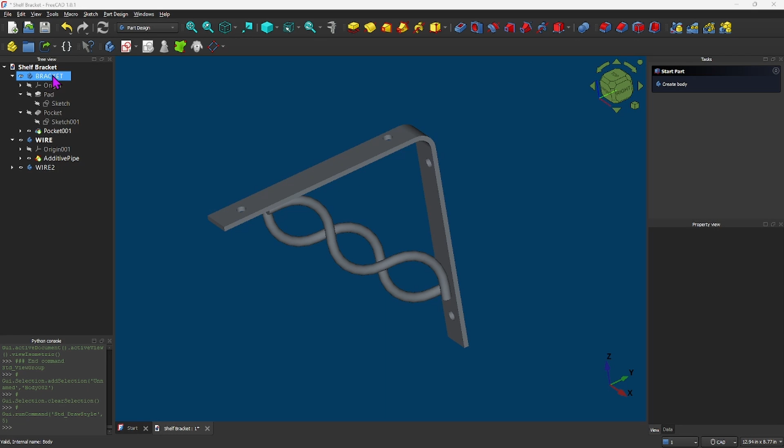Alright, just for the heck of it, select all of those. Let's come over here and hit View tab, and the shape appearance - I think that's what I want, shape appearance. I'm going to slide it on up here to more of a, get it kind of a bluish gray. Select OK, and there we go. Just kind of a bluish gray bracket.

I'm going to set it back to wire before I - flat lines, no shading. Yeah, flat lines, there we go.